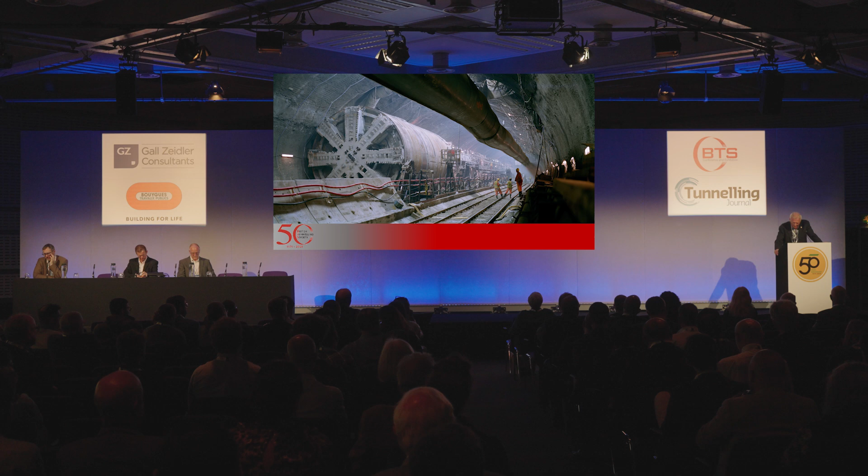So we had a very robust safety regime as well. And that's probably one of the legacy aspects of it. There was a step change in British industry safety-wise, as Donald Lamont would vouch for. And that, again, is a very good legacy.

I've got a few notes, excuse me, just to make sure I don't run out of things I was going to say before I do.

One of the incidents that we had that didn't really get talked about much was in the crossover. And it's strange, that chamber looked absolutely enormous until the tunnel boring machine came in. And then the tunnel boring machine looked really small, and it was over 9 meters diameter. And the chamber didn't look quite as big. So when they came into the chamber, it sort of spoiled the image of it all.

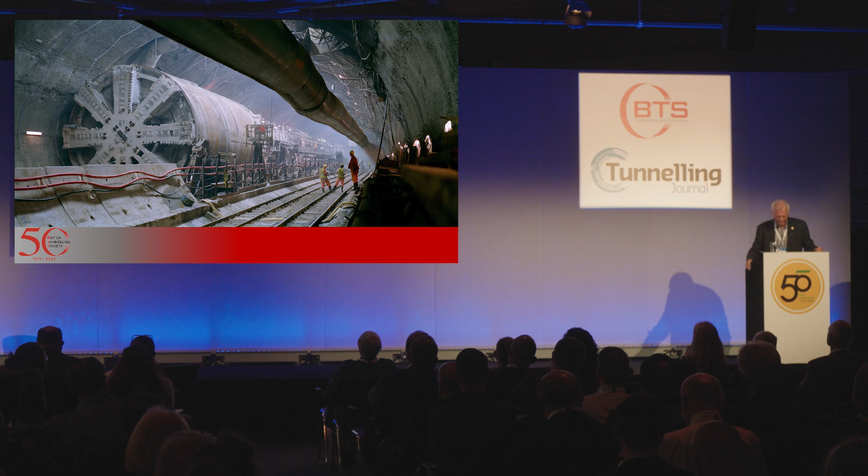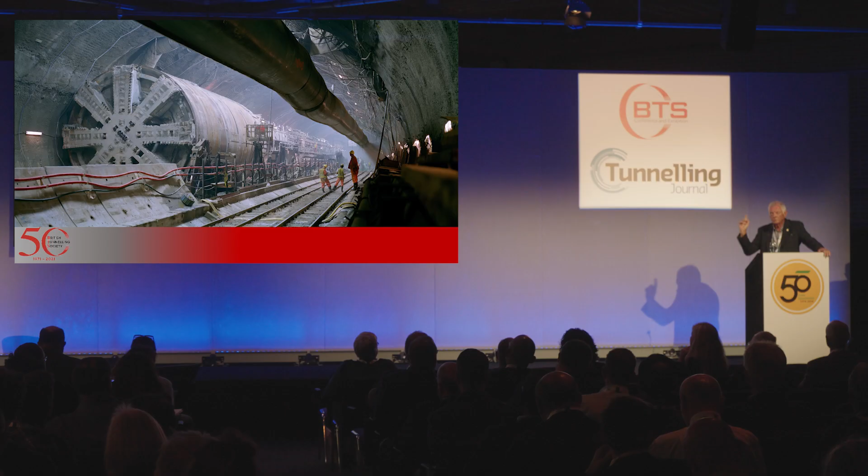I remember taking one of the technical experts from around the world who used to come there, and it was 7 kilometers out from land along the service tunnel to get to the crossover chamber. Whilst we built that chamber, the marine service tunnel boring machine advanced another 7 kilometers, with all the cross passages associated with it, every 375 meters, etc. And the chamber was built from just a small passage that we created out the side of the service tunnel.

I took this Japanese expert into the tunnel, and it's 160 meters long, this chamber. It was 22.5 meters wide, that's a cricket field wide, and 18.5 meters high. The excavation of it with the primary lining had just been completed when I took this guy up. And he walked in and he was just awestruck. Wow. And he rattled on in Japanese about how unbelievable the size of it was.

And when we were doing the crown of the tunnel, there was a sudden crack down both sides, in an area about the size of this room, and water started running out. It came about, not from the sea, because there was a volume of water just above the tunnel where the pressure had built up on the ground as we constructed the chamber. And it cracked down both sides. We were 7 kilometers out under the sea.

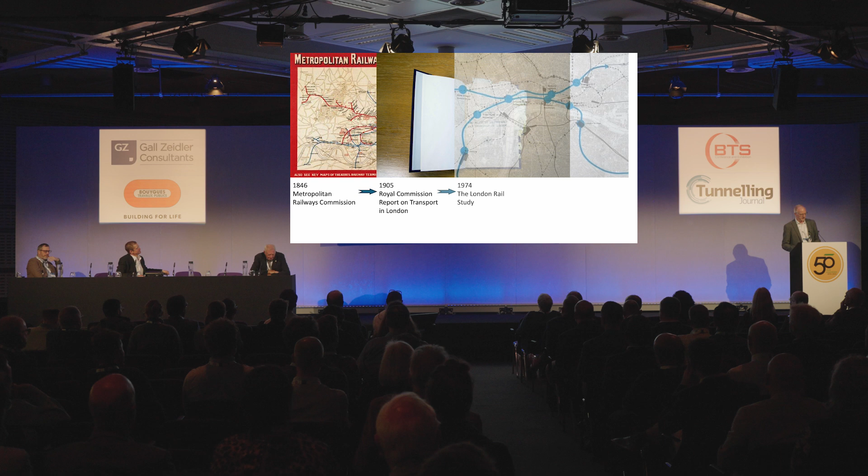Okay. No, I think the Channel Tunnel pretty much just about top trumps Crossrail in terms of the gestation period for the project. But thinking back, there have been schemes for a cross-London link going back to Brunel's time, principally when he wanted to link up Paddington with his Farringdon station as well. And then through the many decades, a cross-London link of one form or another appeared in various documents until it started gaining a bit more momentum after the Second World War.

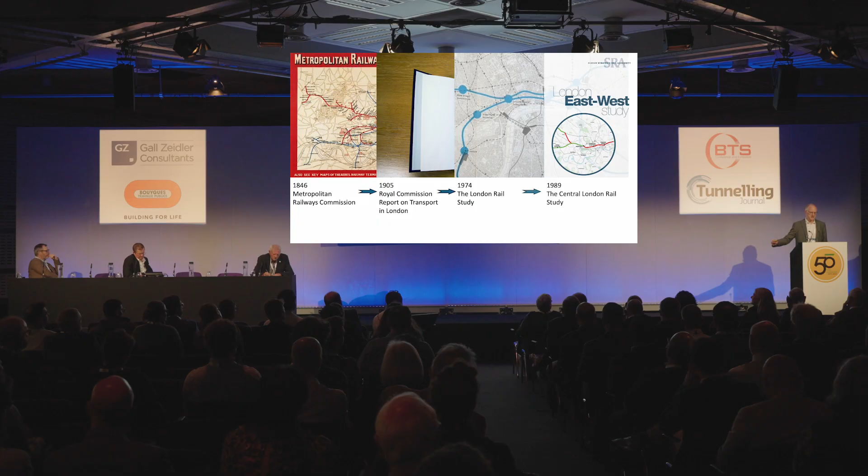But by 1989, we were producing documents that were talking about the Jubilee Line, which is now built, Crossrail, which is now built, and the Chelsea Hackney Line, which is not quite built yet and on hold as Crossrail 2. From that point onwards, I'm kind of referring to my CV, because I came off the Channel Tunnel in 1990 and I started work straight away on the Crossrail project preparing the parliamentary plans. So we're doing parliamentary plans in 1990.

By the mid-90s, we'd completed a full detailed design of the Crossrail route. I worked on the western section from Royal Oak Portal to Tottenham Court Road. That was fully designed, specified, contract documents ready, and then the government pulled the plug. Obviously, £2 billion was too much to pay for a railway in London at the time. The project then went on hold, and finally it started coming to life again in the mid-2000s.

So by about 2005, we'd gone back a few design stages, but we were producing designs for a revised scheme. This time I was working on the western section. And then by 2008, the whole project got approval. 2009, I started working on it full time. And then the tunnelling work started in around about 2010. The majority of the tunnelling was finished by 2015, but there were a few bits and pieces of other works going on after that time.

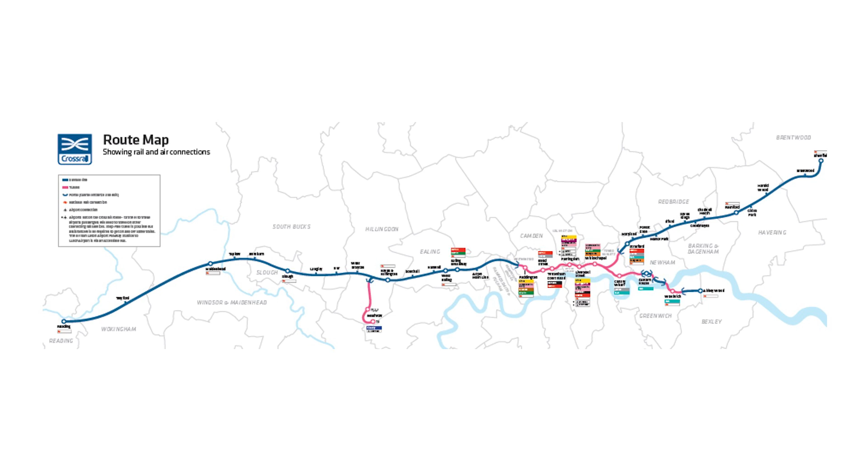Now, at the time, the project was the largest project in Europe, with a route running from Reading in the west, all the way past Heathrow, picking up a spur from Heathrow, through the central city districts, Docklands area, and out to Shenfield in the northeast and Abbey Wood in the southeast. The aim of the scheme, and it's achieved this, is increasing London's railway capacity by about 10%, and relieving congestion at some of the major stations, particularly Paddington and Liverpool Street. So it's relieving crowd congestion.

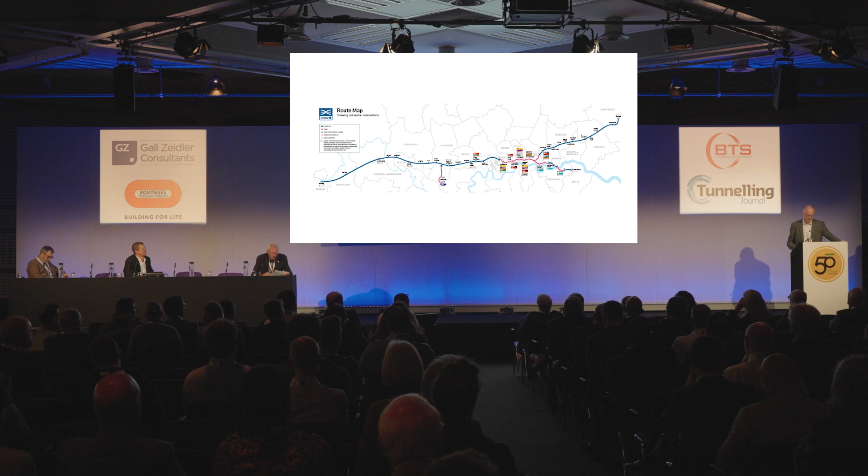Since the scheme's now open, it's brought about 1.5 million people within a 45-minute travelling time of the central business districts in the city. And it's believed that since the project opened, 200,000 new jobs have been created close to the scheme. That's including office workers, new hotels have opened, there's even a new museum on the route, and food outlets as well. In fact, in 2023, 51% of the new office lets in London were within a 10-minute walk of Crossrail.

Now, none of that information is the most important thing about this project, but no matter what anyone tells you, the most important thing about this project is that it was in tunnel through the central section. Now, the main route through the central section is there. You can see all of the different structures that were built, the main structures, stations, shafts, bifurcations, etc.

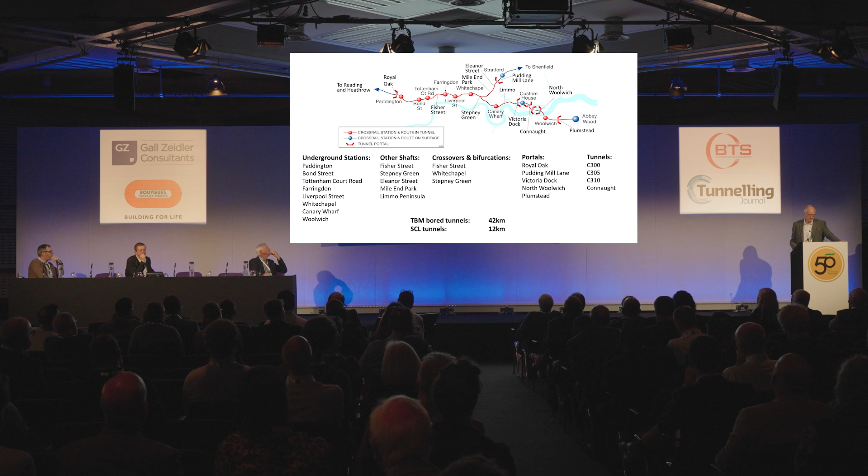And the only thing I'm going to point out on this slide is that for the main tunnel drives, Contract 300 was driving tunnels from Royal Oak Portal in the west to Farringdon. Contract 305 worked from Limmo Shaft in the east, driving tunnels to Farringdon and out to Victoria Dock, but also the section from Stepney Green up to Pudding Mill Lane Portal. And Contract 310 was the main tunnel under the Thames.

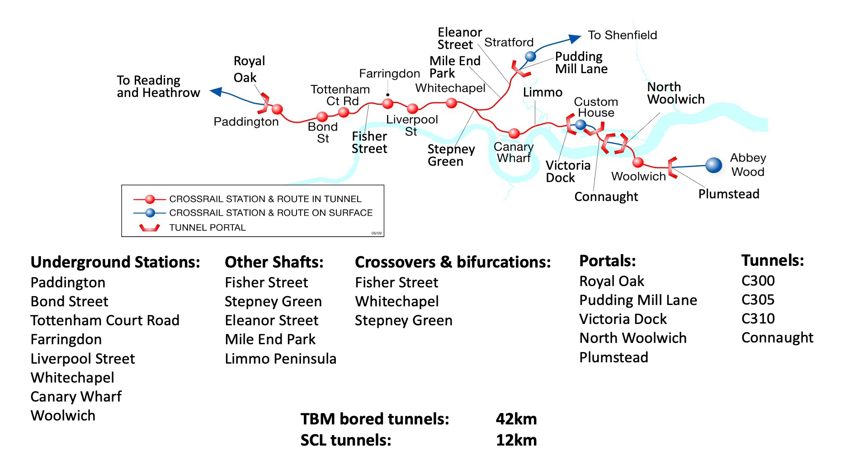In terms of the geology, the tunnels were principally in London clay in the western section, pretty much all the way from Royal Oak Portal to Fisher Street. And then from Fisher Street, moving east, we were dipping in and out of the Lambeth Group, Woolwich and Reading beds to most of us, even getting into the Thanet Sands in places as well. And as you move further out to the east, the Thames crossing went through various strata, but the majority of that contract 310 was in the water-bearing chalk.

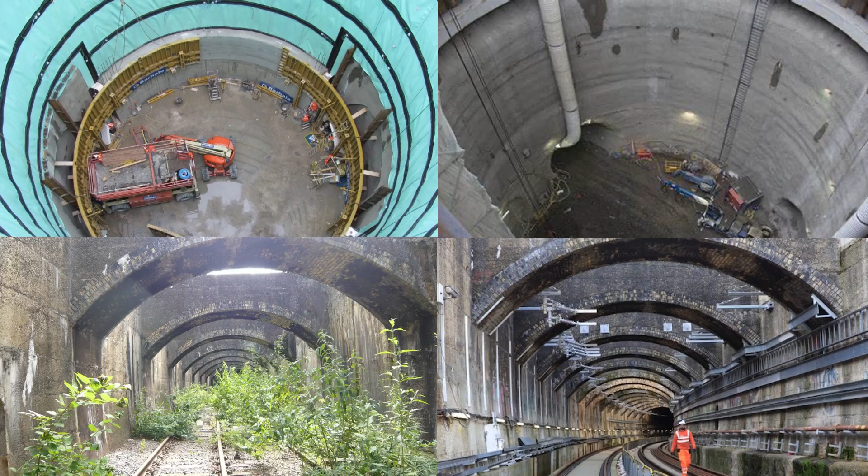Now, I'm not going to have time to go through every structure on the project. I've got a few pictures. The rest of the presentation is pictures, hopefully to remind a few people of happy days. By the time we were working on the project, certainly 2005 up to 2008, we were deleting shafts from the project, but there are still a number of major shafts on the scheme which are acting as plant rooms, ventilation adits, and access points as well, particularly where the station spacing might be a little bit large. The other tunnel worth a mention is the Connaught Tunnel, because that's slightly different from everything else we did on the scheme.

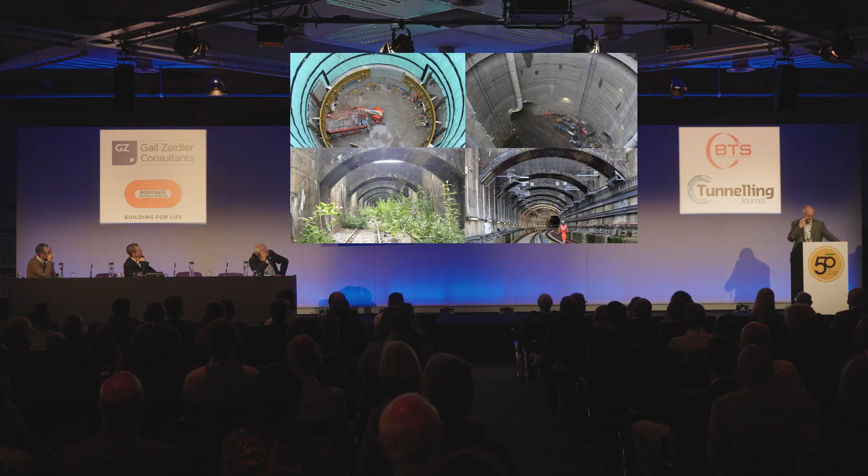Connaught Tunnel was pretty much a disused, dilapidated tunnel. It was too small. It was falling apart. It flooded on a regular basis. And on that scheme, it was brought up to modern railway standards through a combination of replacement and refurbishment works.

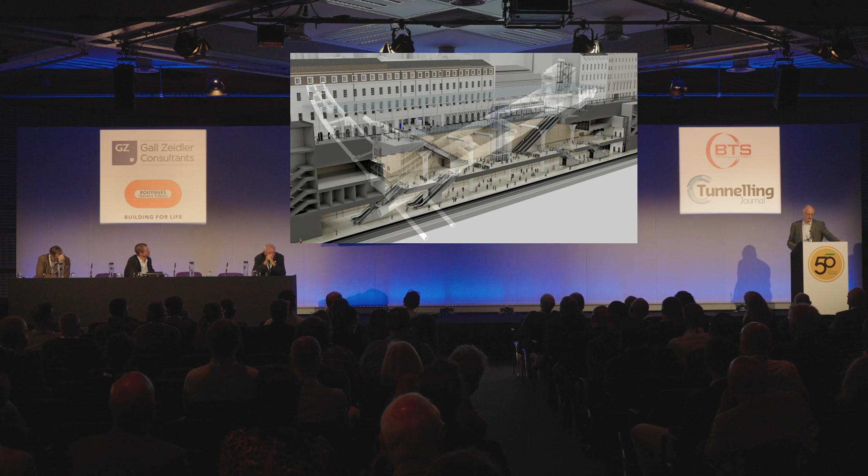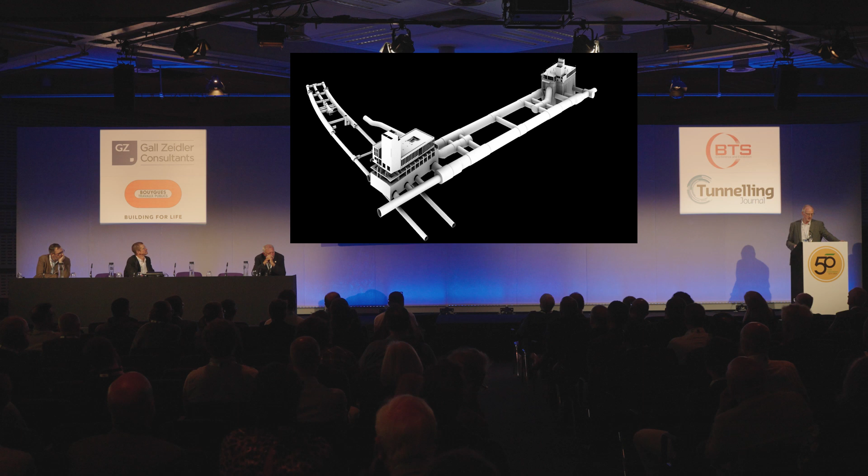If we look at the stations on the project, they pretty much came in two flavours. The first flavour is large box structures, like the one there. That's actually an image of Paddington. And the other flavour was bored SCL-supported ground, bored tunnels for the platform tunnels, concourses, escalators, etc., but with slightly smaller boxes at the ends, housing ticket halls, plant rooms, and again, ventilation equipment, etc.

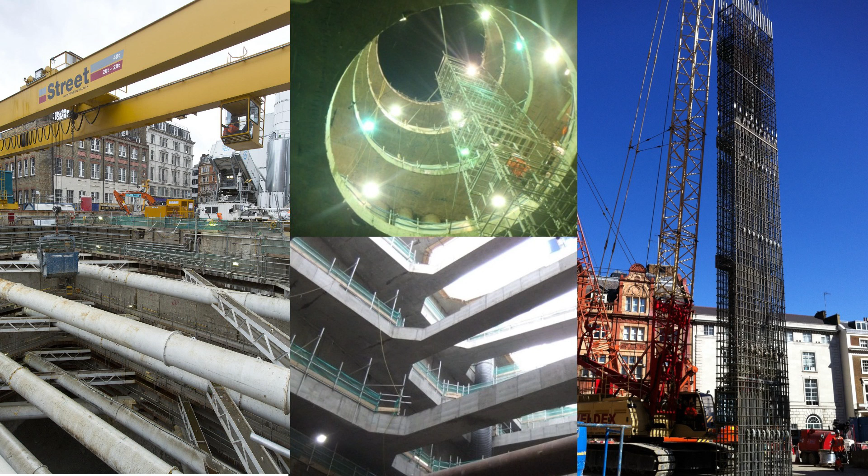So those big box structures were constructed through a combination of diaphragm walling and piling, again with a mixture of top-down and bottom-up construction techniques, quite often constructed in very confined spaces with sensitive neighbours. Sometimes the sites we were working on were actually no larger than the station footprint itself. So very, very difficult conditions.

Also, a lot of these stations and shafts at some point in the contract might have had a TBM passing through them, so they had to be designed for that. And it also became a bit of a programme issue in getting everything aligned between the different contractors to decide who's going first, who's going to be second, who's going to stand around for a little while the other contractor completes his work.

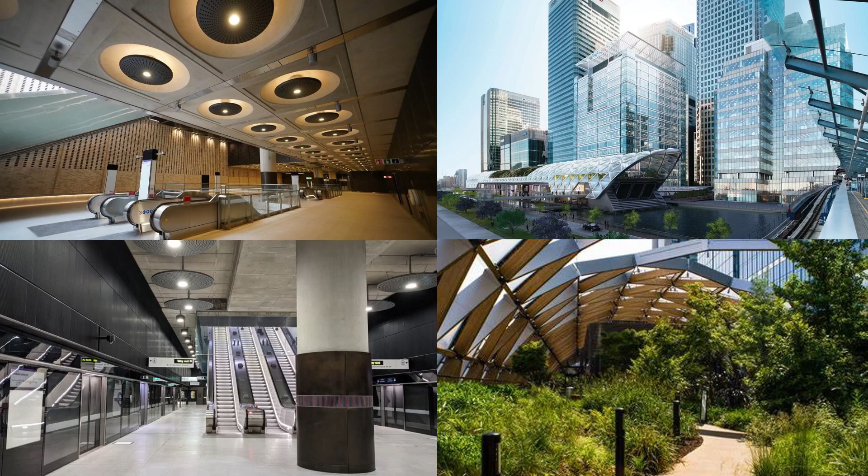The completed station boxes all have a slightly unique feel to them along the project, but they are generally structures that have tried to use natural light wherever possible. They're not the largest structures in the world, but by London standards, they're pretty impressive. The Canary Wharf station, for example, on the right-hand side with the garden in the top, the length of the Canary Wharf station is the same, or just slightly less than the height of the Shard. So it gives you an idea of the size of the excavations we were doing.

For the bored platform tunnels, the platform tunnels, the escalators, the concourse tunnels were all very similar size and shape, around the 10-metre mark for the finished diameter. They were constructed with a sprayed concrete primary lining, waterproof membrane, and in most places a sprayed concrete secondary lining. Farringdon was the exception, where Farringdon used sheet waterproof membrane and cast in situ secondary lining. All of the other platform tunnels generally had sprayed waterproof membrane. A couple of the stations that were in water-bearing ground in the invert had sheet membrane and a cast in situ invert.

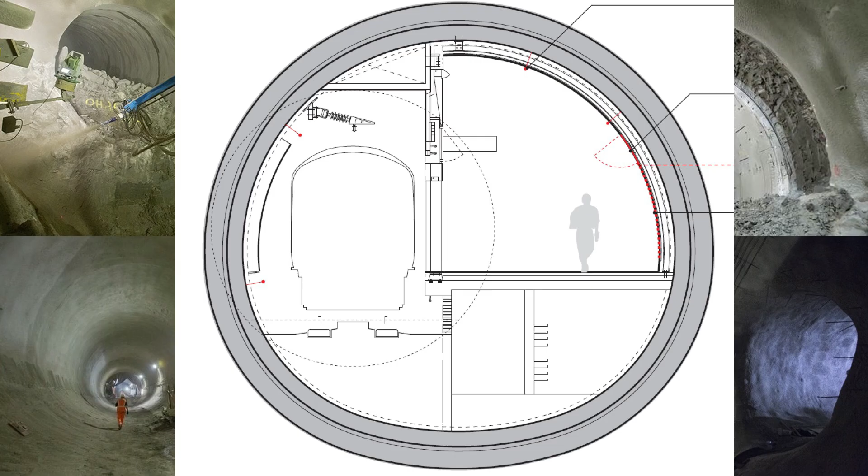The primary lining on Crossrail was taken to be part of the permanent works. So it's taking some of the ground load that's developed before the secondary lining is put in place. The secondary lining then shares the remainder of the ground load and the water pressure.

This actually caused a few issues on Crossrail and some very difficult situations with the interfaces, because the client required the primary lining to be the design responsibility of his main designer. It was an engineering design project. But the contractor was essentially responsible for that lining during the construction process, supporting the ground, preventing ground movement, and for the safety of the works. So there was an issue about who has responsibility for what and when that changed. And that's bad enough in a simple round tunnel as shown there. When you start dividing up into side drifts and having cross passages junctioning with the tunnels as well, that responsibility matrix got very, very difficult.

And for those of you in the audience that were involved in that, I'll take this opportunity to say thank you, and I hope your psychiatry bills weren't as much as mine. For those of you that weren't involved in that, don't ever, ever do it again.

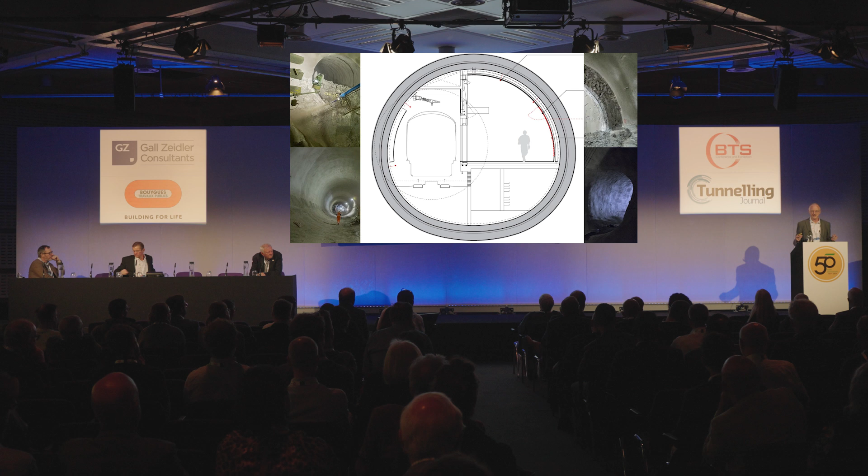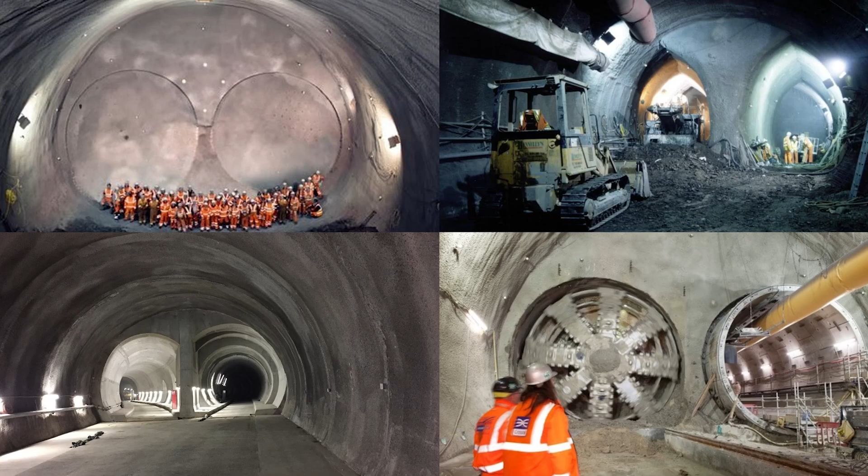So the main station tunnels, generally we tried to work to recommendations in terms of excavation sizes that were recommended following the Heathrow collapse. So we were trying to work to about 30 square metre face sizes and about 4.5 metres height in terms of unsupported face. So we ended up with top heading, bench, invert type construction and pilot tunnels through various stations as well.

The pilot tunnels were either sprayed concrete lining or segmental lining if the TBM went through that station first. Where the segmental lining was used in the pilot tunnel, the length of the rings was 1 metre to align with the excavation sequencing for the sprayed concrete linings.

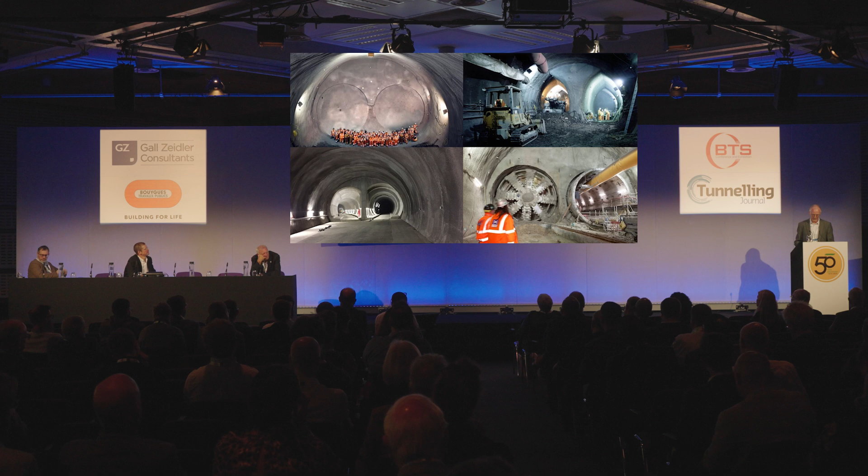The finished bored stations have a slightly more uniform identity across the whole project. They were meant to feel spacious. There's wide platforms, the cross passages are wide, and the concourses are wide as well. So the identity of the project was very much space. The length of the platforms is about twice the length of a standard London Underground platform. So hopefully some of you have been down there to appreciate it.

A lot of work was put into using these curved corners, certainly at the cross passages, but many other areas as well. Again, it was partly an architectural requirement, but it was there to help increase the feeling of the space within the project as well.

There are other SCL structures on the project. These were either bifurcations, which is Stepney Green, where the line splits to the northeast and southeast of London, or they were crossovers, as there were at Fisher Street and Whitechapel. Again, there were multi-face excavations, top-heading bench invert, single side drifts, double side drifts, to achieve the finished product. And again, the lining systems were very much like the platform tunnels, sprayed concrete primary lining. Again, division of responsibility issues there.

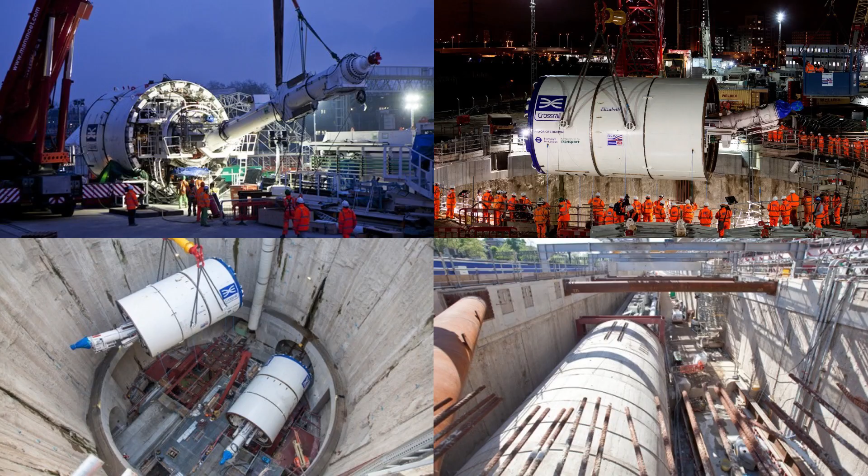Excluding delays, tunnel progress rates varied across the project, depending on all sorts of variables. But generally, average rates were between 10 and 18 rings per day, so that's 15 to 25 metres per day as an average. I believe the maximum advance rate achieved was about 95 metres in one day. So pretty impressive stuff when they got going.

For the tunnels and the stations, we were working under some of the most expensive real estate in the country, so we had to be careful with ground movements. On the station tunnels, with those massive concourses and platform tunnels, we used a large array of compensation grouting to keep the world up where it belongs. On the TBM bored tunnels, the contractors generally worked to a contract requirement of 1% ground loss. There were a few special control zones where we worked to between 0.5 and 0.75, depending on what was required. So we were generally controlling settlement at the face rather than relying too much on other protection works at the surface.

I believe the typical range, we went over it a little bit on a couple of occasions, but typically the contractors were comfortably achieving between 0.25 and 0.5. Most of the time they were probably well under that, and certainly under the 0.25 on many occasions.

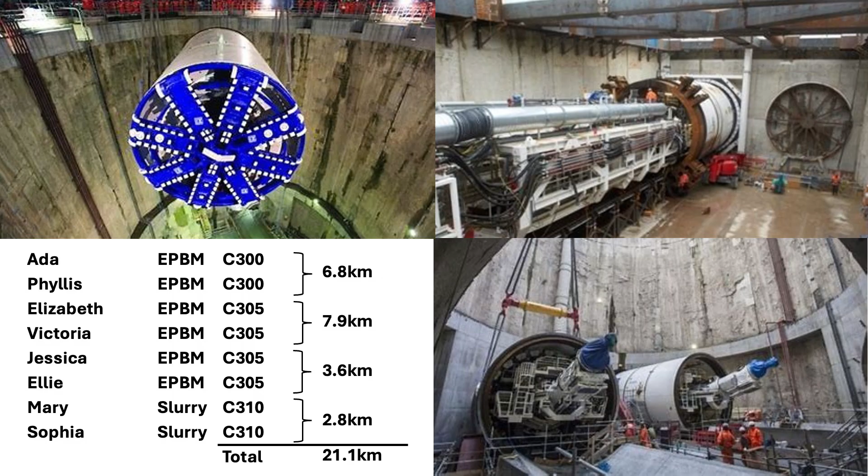The TBMs launched from shafts, relaunched through stations, etc. These were all fairly standard. Just a couple to note that were slightly different. At Royal Oak Portal, the TBM was erected about 600 to 800 metres away from the portal face, and this was to avoid any heavy lifts taking place very close to the mainline railway going into Paddington. The completed machine and the backup was then transported down to the portal face.

And on contract 310, the Thames tunnels, they used the tension rod launching system, launch ring system. So basically tying the launch ring to the head wall in front of you and using tension to push the machine into the ground, which eliminates the need for temporary rings to shove the TBM off a shove frame.

In terms of reception, again, lots of different receptions in adits and through head walls. The interesting ones to note on the project were at Farringdon, where driving from the west, the machines turned a sharp corner, much like we're looking at on the Channel Tunnel. We turned a sharp corner, stripped out what we could and buried the machines in the ground either side of Farringdon Station. The machines coming from the other direction were dismantled underground in purpose-built chambers at the end of the platform tunnel.

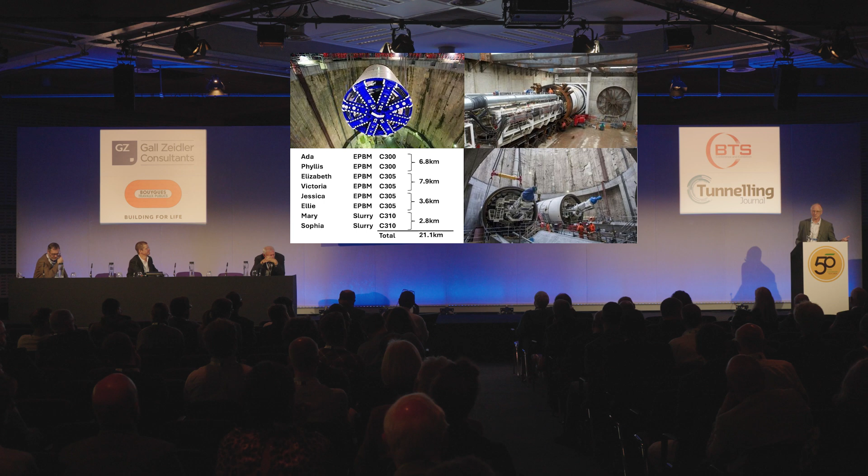The tunnel spoil was generally removed through conveyors, through the tunnels up to the surface. Obviously, with the slurry machines, it was pumped out. And from the surface, it was either transported by barge or by rail. About just over 98% of the material was reused on various schemes. Most of it went to Wallasea Island to create a bird sanctuary, but there were a few other local initiatives as well, filling up old landfill sites, etc.

Segmental linings, I'm going to whip through the segmentals. We've all seen lots of segmental tunnels. They were supplied, manufactured on three main sites: Old Oak Common was one site, Chatham in Kent was another site, and the Shay Murtagh facility in Ireland supplied segments as well.

They were all steel fibre reinforced, and there were a couple of local sections, particularly under the floating track slab, where we needed to have a little bit of reinforcement in the cages. 6.2 metre diameter running tunnels, 3 dowels between the rings, 2 bolts through the longitudinal joints, which were generally removed where they had run a risk of coming loose and falling out and affecting operational railways.

The tunnels had a left and a right ring on 2 of the contracts. This was because we couldn't have the keys in the invert, as the loads from the floating track slab pads were not compatible with a key being in place. So we had left and right rings, rolling the rings, but keeping the key above the axis. Now, I didn't actually check this fact, it's just from memory and I may be wrong, but I believe contract 310 didn't have any floating track slab and essentially used a universal ring system. Just some more images of the ring build there.

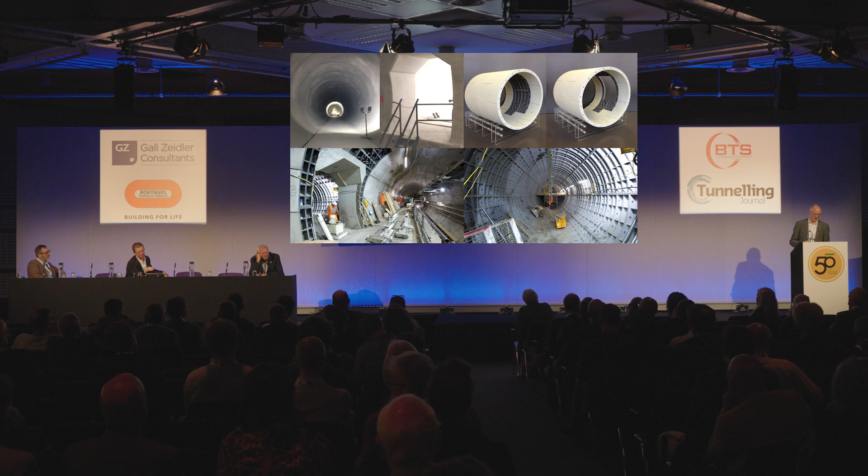There were many other structures and tunnels on the project - cross passages, diverted cable tunnels, ventilation adits, etc. There was a combination of using SGI and sprayed concrete linings. Where we were breaking out of the main running tunnels, we had what I think most people are familiar with now, which is the hybrid ring system - an SGI frame with temporary segments that can be removed, top right on the screen, basically forming the permanent structure, or the majority of the permanent structure, to support the opening.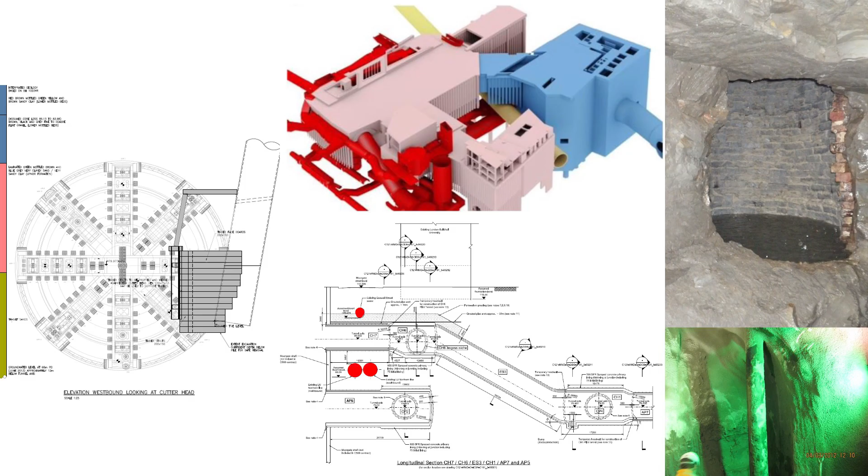Contract 310, again, did things slightly differently. They had more extensive temporary works and used a reinforced concrete support system. Now, obviously, everything didn't go perfectly on the project, but we had some good days and bad days.

Some of you will recognise those pictures of some of the things that occurred on the project. We hit a well at Tottenham Court Road, on the right-hand side there, a brick well. On the left-hand side there, we hit a raking pile in the docks, in the Docklands area - the TBM hit that. But there were some worrying times that actually went very, very well. At Tottenham Court Road, top centre picture there, we weaved the TBM through the existing pile structure. We passed less than a foot away from the Northern Line platform tunnel on that particular section of the route.

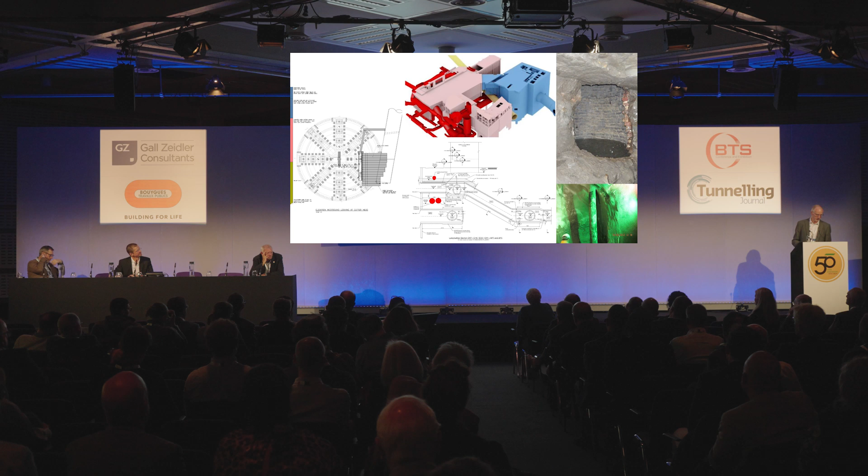The bottom centre picture there was one that always worried me in the early days. The red in the middle, the two red pictures there, are the Northern Line, and we were constructing a massive shaft, ticket hall box, and enormous SCL tunnels above and below the Northern Line there. Again, the line remained operational, but everything went swimmingly.

On the legacy side, when I first joined the project, the word innovation was almost banned, but that soon changed, and Crossrail introduced the Innovate 18 program, a way of sharing ideas and knowledge across the project. All of the main contractors contributed seed funding to that, and I imagine a lot of them paid for a lot of the work on their own projects as well. In the first year of initiating the scheme, we had 800 ideas come in, and 300 of those were funded.

The Innovate 18 program morphed into the I3P scheme, and I think there were some representatives here today. I usually get this the wrong way round, but I3P is the Infrastructure Industry Innovation Partnership. On the other side of the legacy, we collated and disseminated large amounts of information, which is still available today through the Crossrail Learning Legacy website.

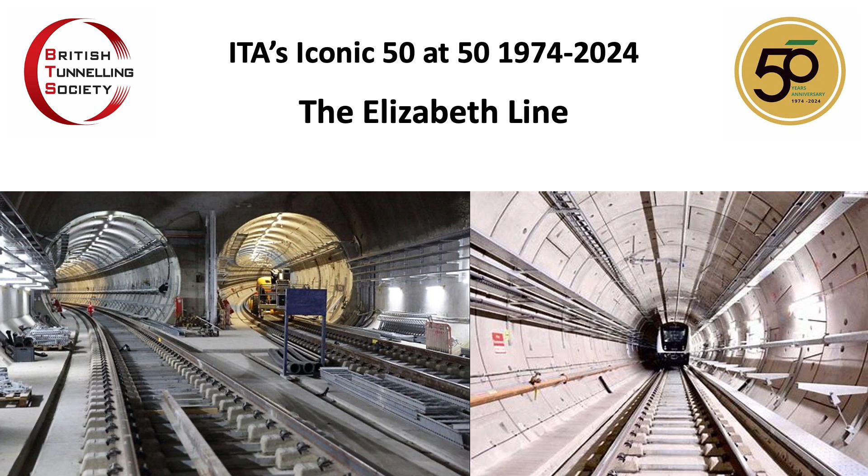Evening all. I'm going to talk to you about Tideway, colloquially known as the London Super Sewer. I'm conscious that probably many of you have been involved in the project itself, so I'll give you a brief history of the project, where we are now, and also touch on some of the softer legacy commitments we've made as part of the project.

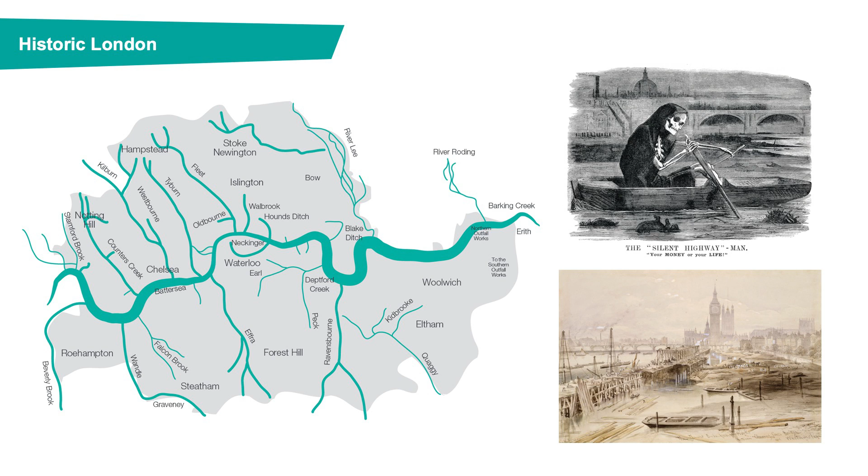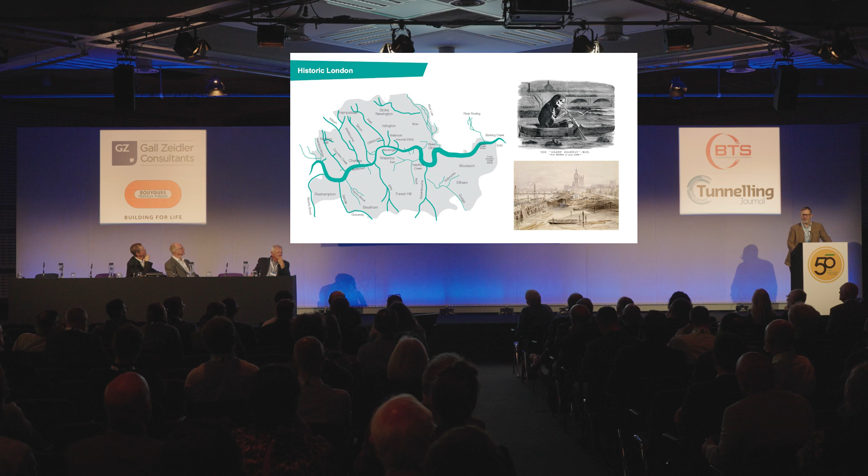So starting with the history. We're looking at the rivers there, the lost rivers of London, probably the early 19th, 18th century. As the population of London grew, those rivers became open sewers. In the early 19th century, they became culverted in, so they almost became officially sewers themselves, but they all emptied out into the Thames. As the population continued to grow, as the flows continued to flow into the Thames, it culminated in the Great Stink of 1858, which many of you will probably know a little bit about.

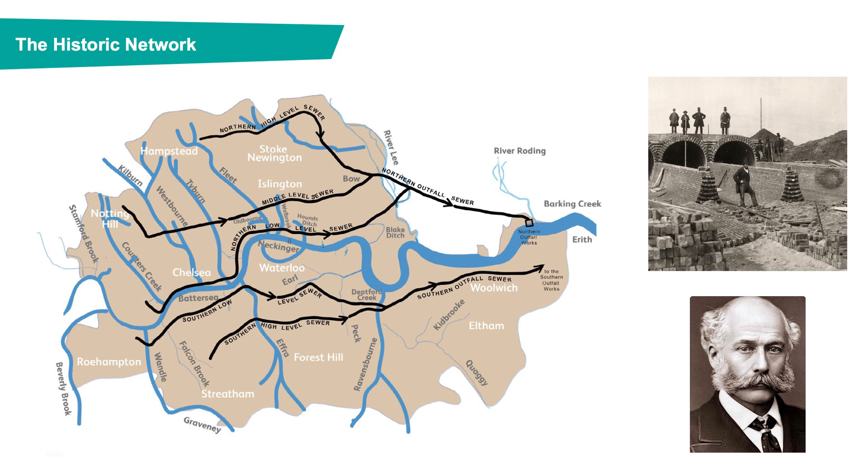This resulted in the government of the time decamping to Oxford for 3 years and setting a young man by the name of Sir Joseph Bazalgette on the quest to solve the problem. His solution is actually very simple: a number of interceptor sewers, effectively cutting off the rivers as they diverted down into the river itself. So he intercepted those flows and took them to a point in East London, now Beckton, which on a rising tide, where it outfalled into the river at Beckton, wouldn't reach the Houses of Parliament. So a very, very clever man indeed.

So the population in 1860, when he started work, was 2 million. As any good engineer, he decided on some additional capacity, so he designed it for 4 million. That population was reached in 1920. We've passed 9 million now, and we're heading towards 16 million. So those overflows, which he built into his system, effectively mean that when the interceptors are overwhelmed, they overflow into the river.

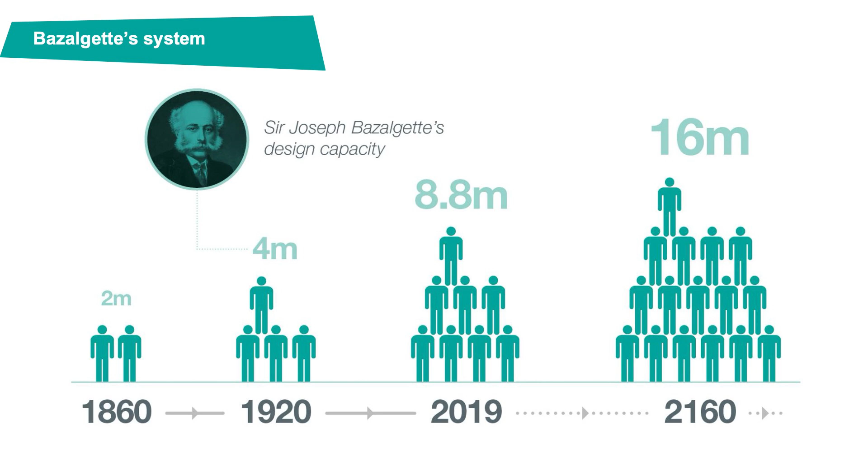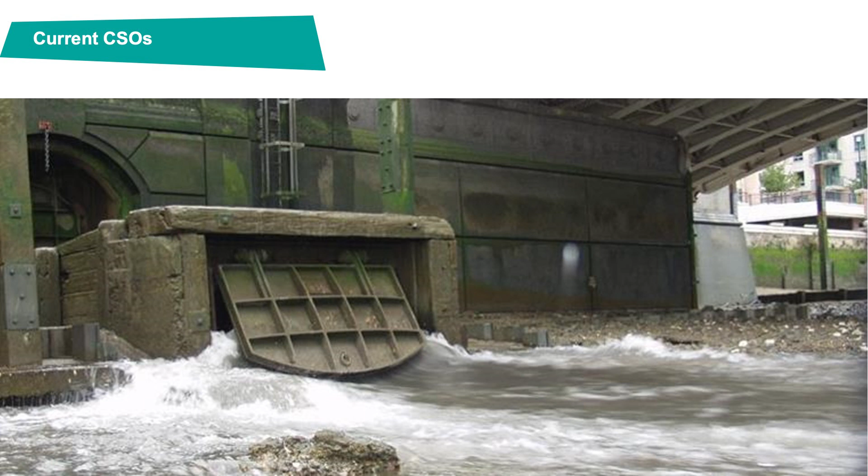So we have a problem. That is the problem. In a typical year, we have 50 to 60 discharges into the River Thames, all along the tidal Thames, with a typical outfall of about 39 million tonnes of sewage. Not a nice thing. Now, the actual solution to this problem comes in 3 parts.

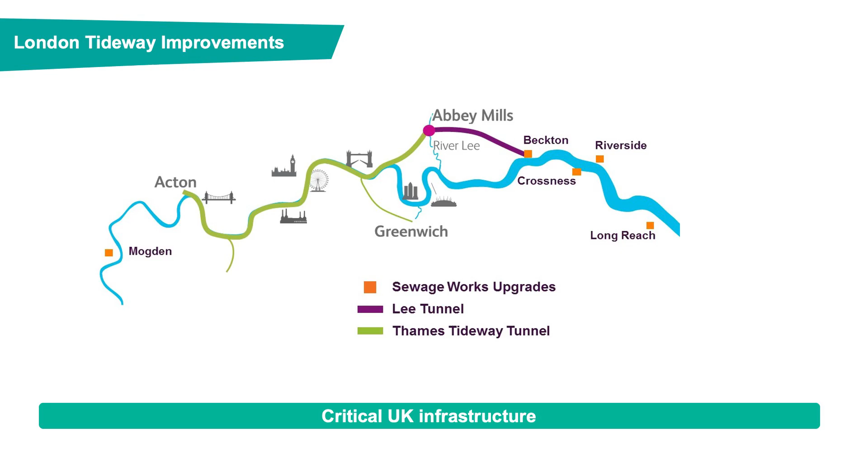There's the sewage treatment works upgrades, which were all completed earlier in the 2010s. The Lee Tunnel, which was completed back in 2015, 2016, has been operating since then. Why was the Lee Tunnel done early? That was because Abbey Mills is the single largest contributor to outfalls into the Thames itself—that's 40% of all the flows into the Thames as CSO discharges come from Abbey Mills. And the last element of the puzzle is Tideway, the Tideway Tunnel.

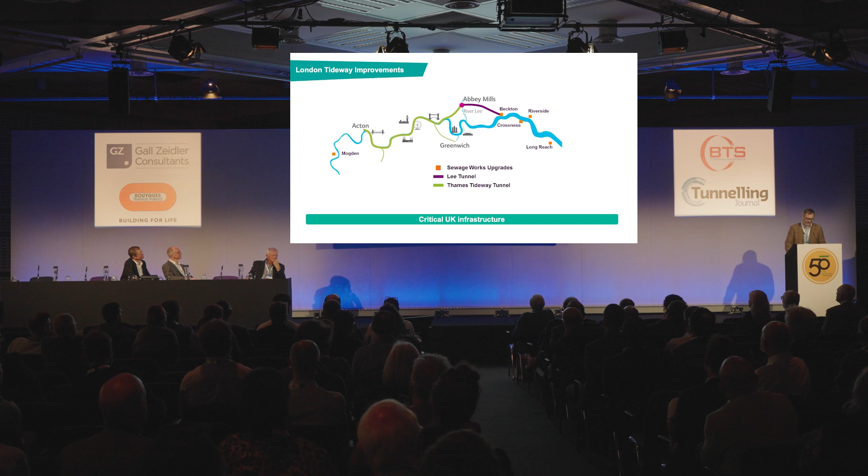So how does Tideway work? Well, effectively, it's a 25-kilometre tunnel. The majority is 7.2 metres in diameter internally. It falls from Acton in the west all the way to Stratford in the east. Collectively, with the Lee Tunnel, it has 1.6 million cubic metres of storage.

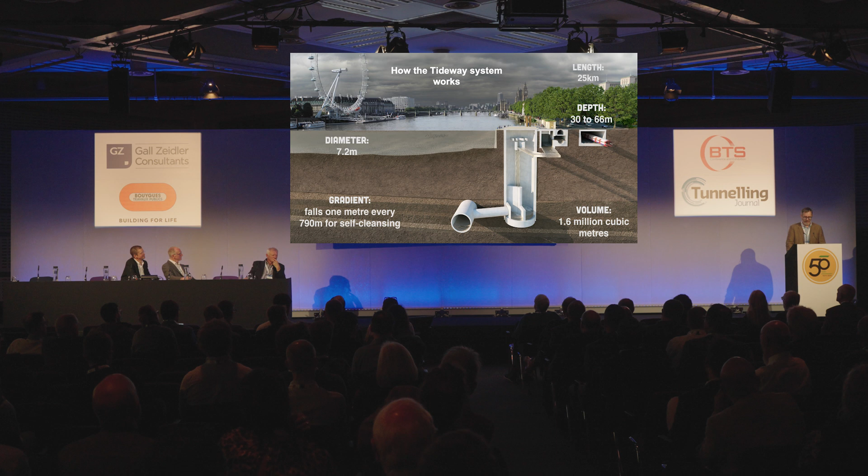This is a slice through the Victoria site, which many of you probably passed today on your way here. The gradient is 1 metre in just shy of 800, and it starts at sort of 30 metres deep in Acton and slowly falls down to sort of 66, 70 metres in Stratford. The Lee Tunnel itself actually finishes down at sort of the 80 metre mark, where there's the Tideway pumping station at Beckton, which then raises all the flows back up for treatment through the sewage treatment works at Beckton.

That's the tunnel itself, so it's 23 sites. There are 18 direct interceptions of outfalls into the Thames. It influences a number of others, so effectively there are 57 outfalls in total across the tidal Thames. The Tideway Tunnel and the Lee Tunnel effectively influence 37 of those outfalls, which results in a 95% reduction in discharges to the Thames.

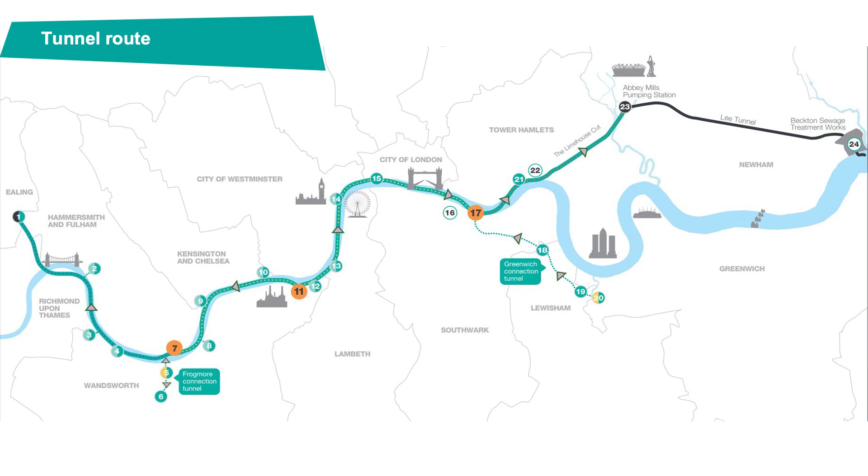Very simply, in section, this is the tunnel. There were three main works contracts, West, Central and East, all tunnelling contracts, loosely aligned with the geology. So West was predominantly in the London clay, Central was in the shingles and the sands, and

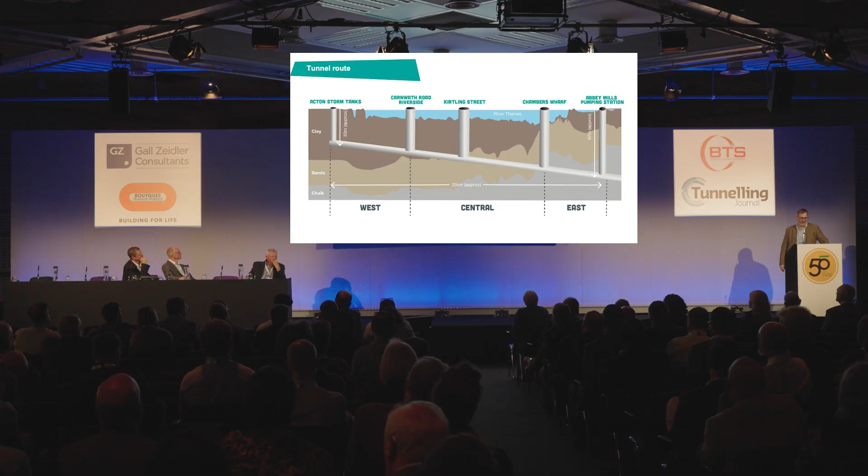the Eastern contract was predominantly in the chalk. The Central contract was the only double drive shaft on the project, but there were also two rather significant connection sewers: one through Greenwich, a 5 metre diameter connection from Greenwich pumping station, and also one in Wandsworth, which was 2 kilometres of 2 metre diameter connection sewer.

So delivering those tunnels, consortia, JVs, three main works contractor JVs, made up of BAM Nuttall, Morgan Sindall, Balfour Beatty, Ferrovial, Laing O'Rourke, Costain, Vinci, and Bachy Soletanche. So the main works were undertaken through an Option C target price NEC contract.

And then connecting them all up was the systems integrator. So this was the control system, a fraction of the cost of the main works contracts, but very, very important indeed. And that's the stage we're going through at the moment, the systems integration piece with Amey. So they were under an Option E.

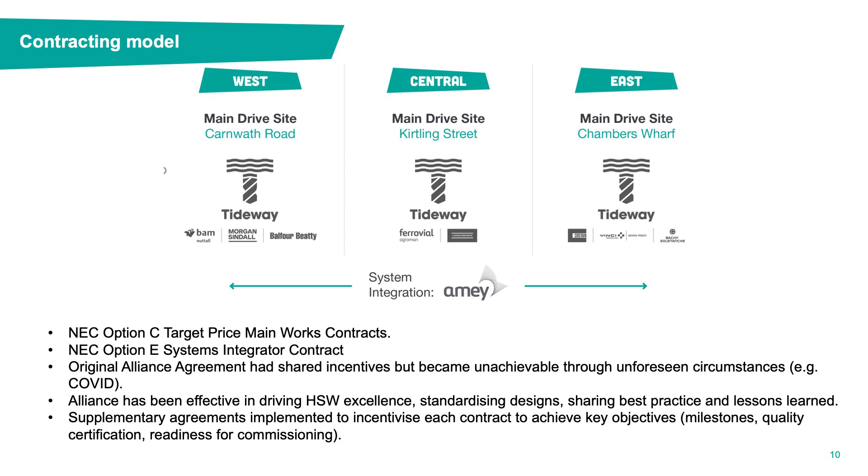They needed that flexibility because they needed to work with the main works contractors, so it seemed much simpler to do that under an Option E. There was a veneer over the top of an alliance agreement, which worked very well from a health and safety perspective and standardising designs, sharing best practices and lessons learnt. However, the incentives within that alliance soon became unachievable because of some of the issues encountered along the way, for example COVID.

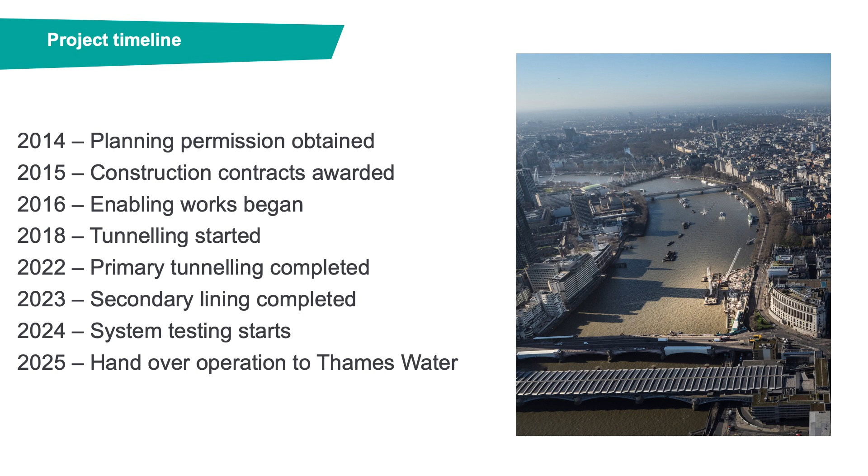Very brief timeline for the project: planning permission, the DCO, was obtained in 2014. There was a year of enabling works before the main works contractors started in earnest in 2015. Tunnelling started in 2018, and primary tunnelling and secondary lining finished, as you can see, 1 and 2 years ago now. So we are now in the midst of connecting up all those sites through the tunnel and activating those sites.

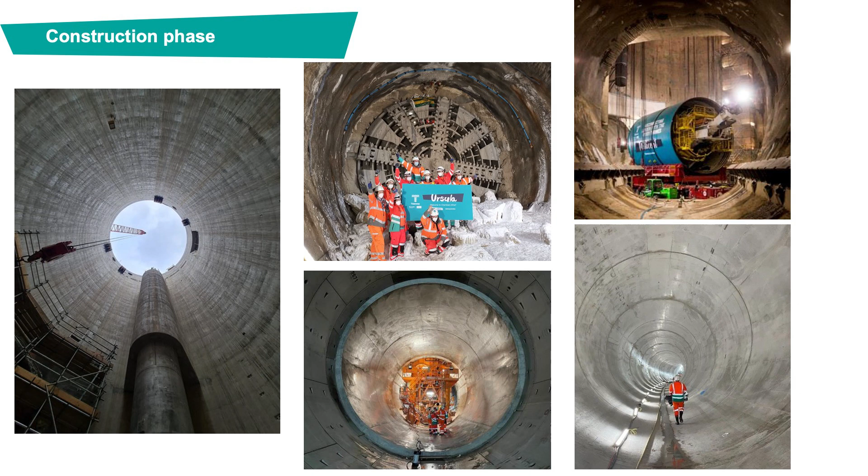So some of the pictures there, as I said, some of the tunnelling activity which is now complete. This is actually Abbey Mills pumping station, and you can see Bazalgette's old sewage pumping station in the background there, the Cathedral of Sewage, as it's colloquially known. So this was back in March this year.

This is effectively a large manhole cover being lifted into place on top of the shaft at Abbey Mills, the connection between the Lee Tunnel and the Tideway Tunnel. This was a 1,200-ton lift, a huge programme saving, because this was constructed just by the side of the shaft itself and lifted into place. This effectively sealed the tunnel itself.

And shortly afterwards, in May of this year, the isolation between the Lee Tunnel and the Tideway Tunnel was removed to form a single tunnel system reaching from Beckton all the way back to Acton.

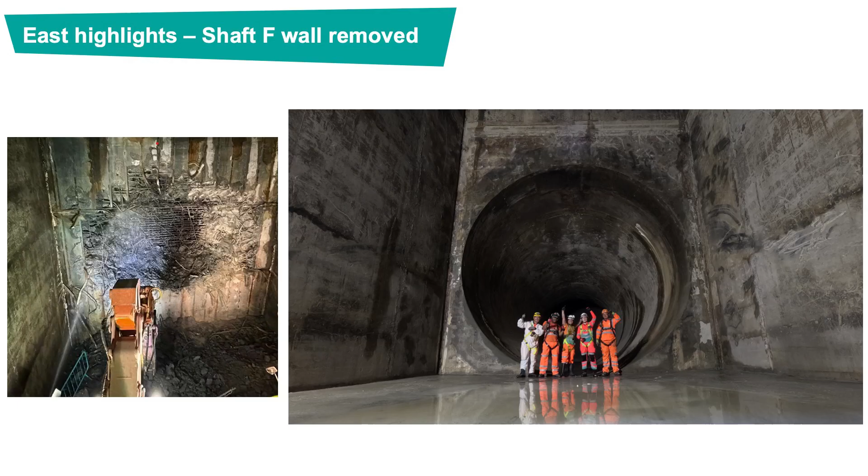So where are we now? We are actually, the West and the Central contracts are nearing completion. It's turned into a bit of an architectural and landscaping project for those guys and girls. We're doing a lot of worksite testing.

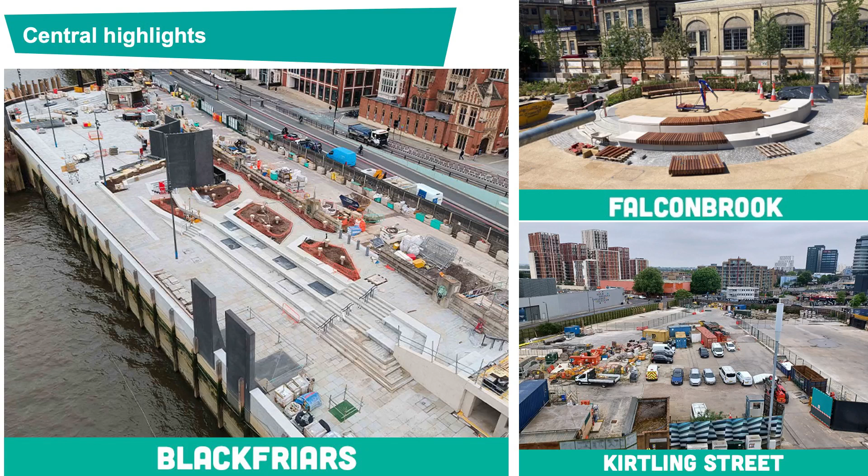Similarly, this is the Blackfriars site just down the road. This is the largest piece of new urban realm, which is going to be opened probably later next year. But as you can see, it's still coming along very well. There's still some very integrated and difficult works to be undertaken under Blackfriars Bridge, which you can't see in that picture.

Similarly, further west, that's Falconbrook Pumping Station in Wandsworth. Again, they're looking at effectively opening those sites very soon. And Kirtling Street, which was our double drive site in the middle of Battersea, right next to Battersea Power Station, was a huge logistics centre for the whole project, certainly from the central perspective, because it is driving east and west from that site.

That now is basically a large concrete slab, and the property is slowly being returned to its previous owners. Three land packages have already been handed back to Battersea Power Station, who will be looking to develop it.

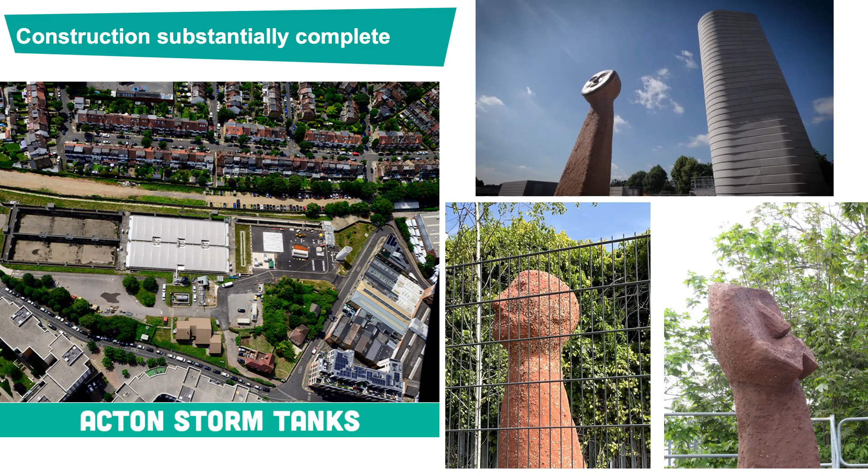Acton, so this is where the tunnel starts. It's actually a Thames Water site. It's a storm tank site. Construction is substantially complete there now. That's some of the artwork that's been built or installed on the site itself, and that was opened by the Bazalgette family, descendants of Sir Joseph, last month.

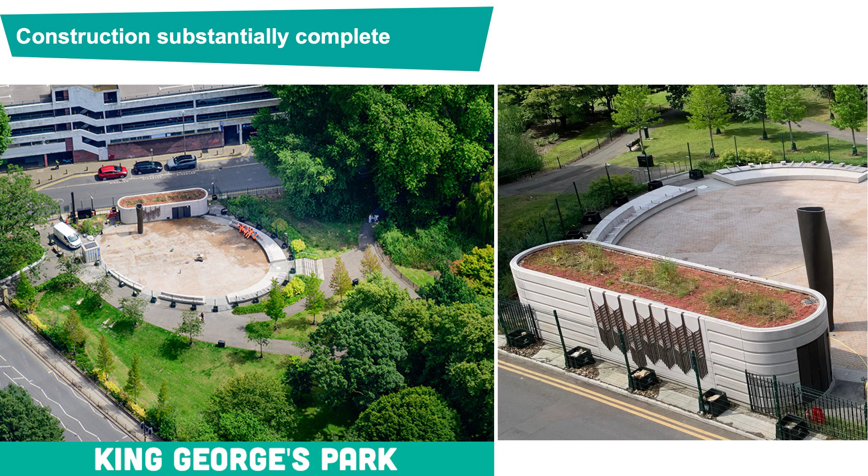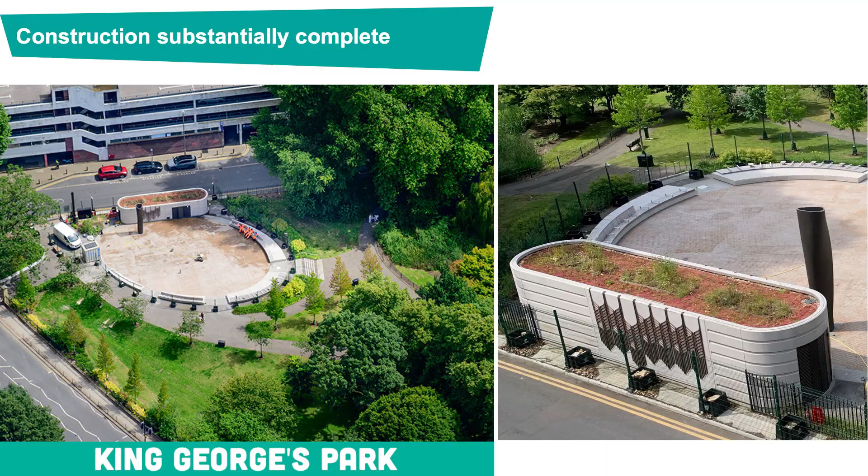Moving on to King George's Park, this is in Wandsworth. This site was handed back to the public about 3 weeks ago. There was a bit of an unveiling there with the council. Again, you wouldn't actually recognise it as a sewage interception site, but that's what's happening underneath. The egg shape there is effectively a rough outline of the shaft itself.

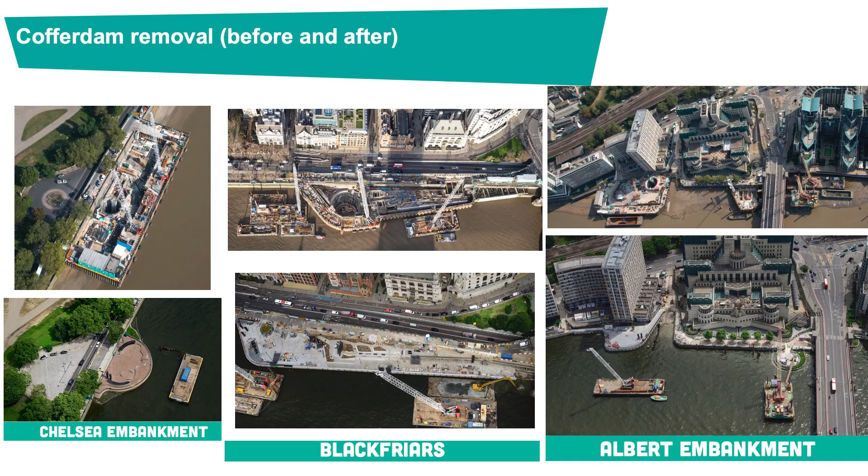And then moving on to some of the works that are going on in the central contract. Nearly all the river sites are in the central contract, or the central part of the river. So a lot of cofferdam, a lot of marine works have been undertaken there. So we're at the process now of actually removing those cofferdams.

You've got before and after pictures there of where they were probably a couple of years ago and where they are now. So a lot of the marine works have been undertaken and completed across Chelsea, as we've seen before, Blackfriars, as we've seen before, with Albert Embankment, which is another one of the sites directly in front of the MI6 building in Vauxhall.

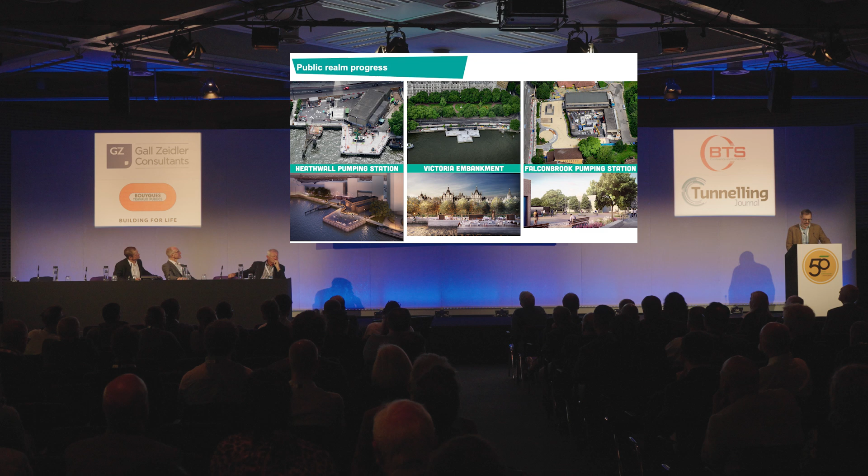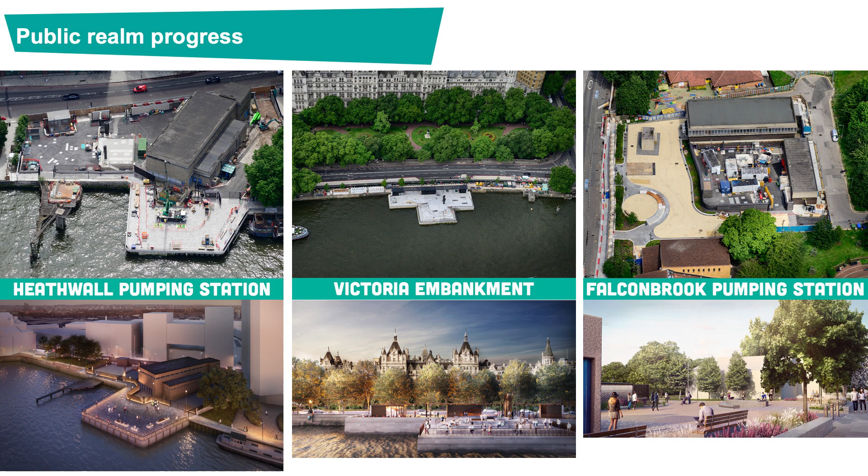Some of the sites that aren't quite there yet. So Heathwall Pumping Station. Again, that's right in the middle of the Vauxhall development area. Victoria, that's nearing completion. That's probably the nearest site to this one, and probably the best place to go and watch the fireworks, I would suggest, next year, because it's directly opposite the London Eye, and it is actually a very, very good piece of public realm.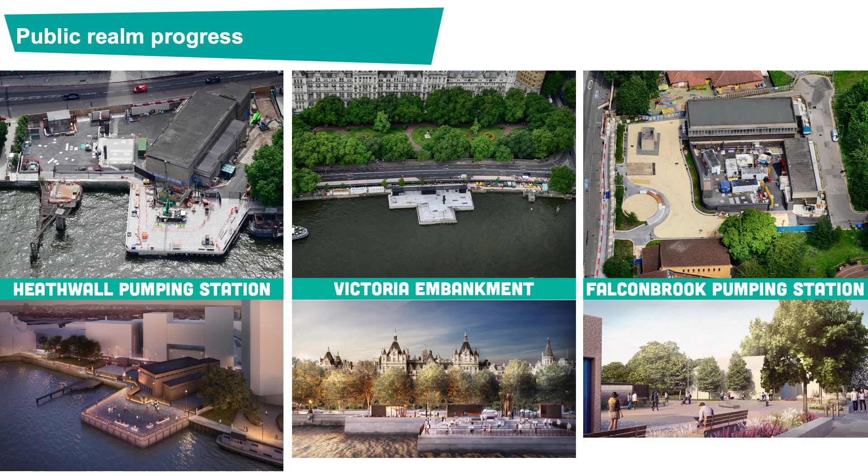And finally, in the central, that's Falconbrook there. Again, the pumping station, as you can see, the Thames Water pumping station in the middle, but the new public realm that's surrounding it.

Moving on to East, well, construction's still ongoing in East. I'll start with Earl pumping station. So that opening is actually just to show where the last flume, the last piece of temporary works which were intercepting or protecting the workforce from the sewer flows, were removed earlier this year.

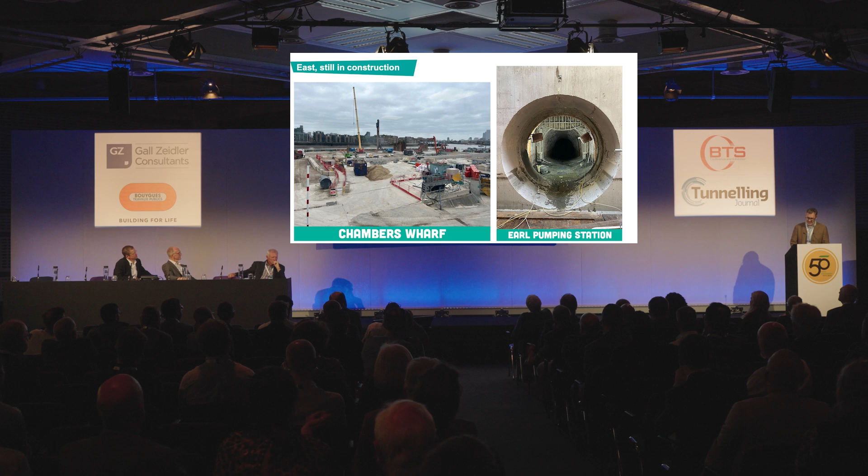And then on the left, Chambers Wharf, which was the drive site for the East contract. That had a large cofferdam constructed, increased the size of the site by 30 to 40%, just as a logistics yard to be able to do the tunnelling from there. Now they're in the process of removing that cofferdam, and I think circa 35,000 tonnes of material needs to be removed before that cofferdam is fully removed.

Finally, in East, King Edward Memorial Park. So this is in Wapping. So again, you can see the marine works going on. So that's cofferdams coming out again. A lot of the sites now in East are in the mechanical electrical ICA testing phase. They were always slightly tail end Charlie from the other two contracts. So they are very much the critical path for completion of the whole project, but they're well on the way.

Now, we didn't get there without a few key challenges. So just a few there. I'll pull out a couple really. I mean, there's the thing called COVID that had an impact on us.

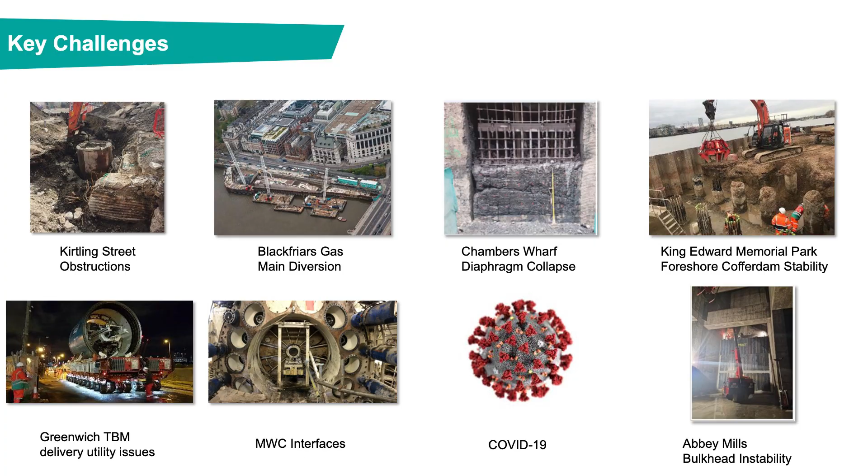King Edward Memorial Park, there's the foreshore cofferdam stability. That's probably one of the few cases where, when we got the development consent order, we had to actually amend it for a design change there. Originally, the KEMP site was an online shaft, but because of that ground instability, it had to be designed as an offline shaft to maintain programme.

But some of the other challenges we had, certainly the Greenwich TBM delivery was a bit of a challenge, only because it was hoped to deliver it in one piece, but in the end, because of the utilities and the weight, it had to be cut into 3 pieces and then reassembled on site. And then the last one, the Abbey Mills bulkhead stability, we had to construct some additional temporary works to secure that isolation between the 2 tunnels.

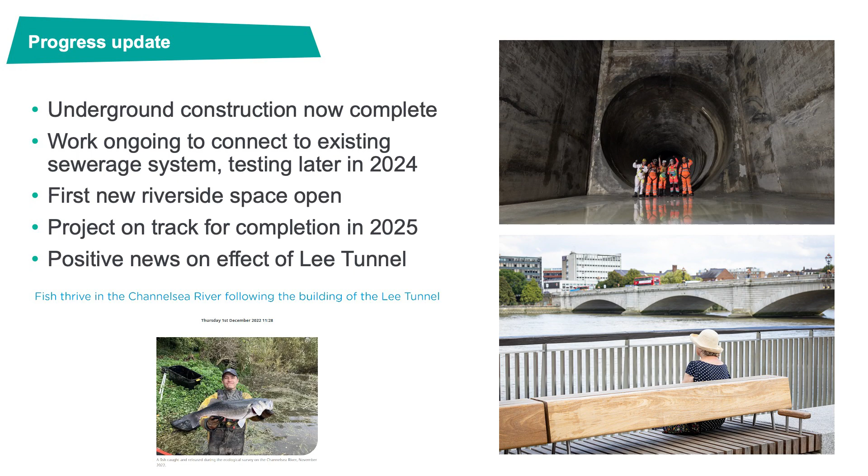So where are we? Underground construction is now complete. We're ongoing with connections to the existing sewerage system. We're actually in the middle of testing as we speak. And the first new riverside spaces are open, as I've said already. We're still on track for completion in 2025, probably summertime in 2025.

And the bottom left-hand corner there, that was a sea bass that was pulled out of the Channelsea Creek. That was the Abbey Mills outfall, which used to discharge into the Channelsea Creek. Before we did the connection between the Lee Tunnel and the Tideway Tunnel, the EA went out and did a fish survey of the Channelsea Creek, and they started pulling fish that size out of it. So that is the benefit of us not discharging sewage outfalls into the Thames. The fish life is coming back. And this is a small tidal creek off the River Lee, so goodness knows what else is available in the Thames.

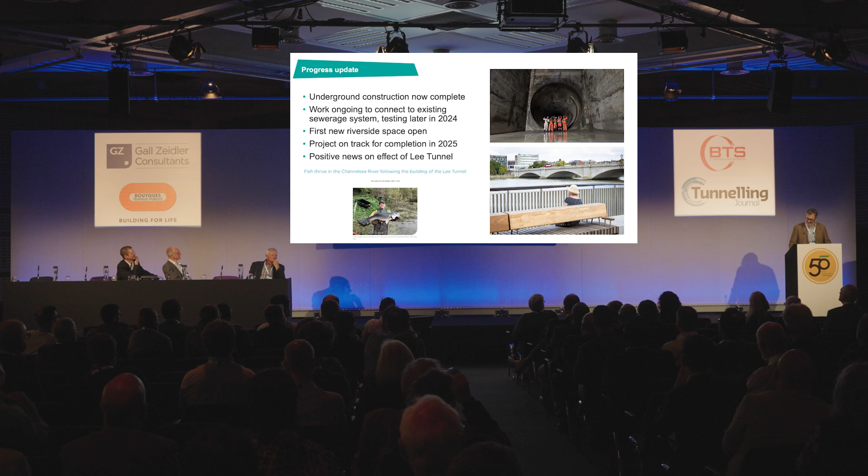So, hot off the press, we've activated 3 sites. That's Barn Elms, King George's Park and Dormay Street, all in the west. They're all the smaller sites. And as of today, we've also activated the Acton site as well. So flows are now being accepted into the tunnel from those sites.

It's a gradual process because of the complicated control system that runs the tunnel and the operation of the tunnel. Each of the sites is activated, and then there's a pause just to make sure that the tunnel's working properly, but also that there are no other issues regarding those sites and those activations. But it's great. It's a great place to be. After nearly 10 years of construction, we are at the point of intercepting flows and cleaning up the River Thames.

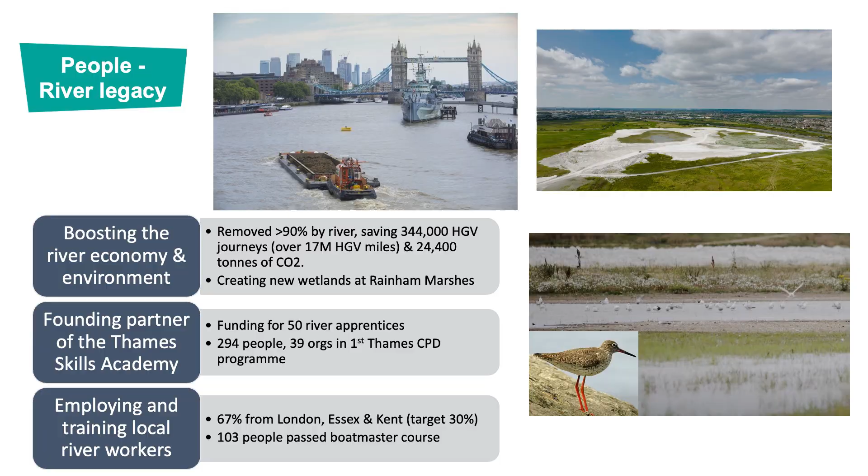We also invested in safer HGVs. We worked with TfL to have the world's first direct vision standards for HGVs, and a number of them were deployed across the project. River legacy. So this is people and economy. So boosting the river economy, really. So we had commitments within the DCO to use the river, but we did more by river. We focused on doing more by river.

So more than 90% of spoil and materials was delivered by river, saving 344,000 HGV journeys, circa 17 million miles, and a saving of 24,400 tonnes of CO2. One barge is equivalent to 50 plus HGV lorries. So although very sceptical to start with, the whole of the main works really adopted this programme of using the river. We trebled the freight on the River Thames with one project.

To go along with that, the project invested and was a founding partner in the Thames Skills Academy. And that was for river apprentices, to bring on the new generation of the marine operative. So 294 people have been through that program so far. And also looking into employing local river workers. As you can see there, 67% from London, Essex and Kent, against a target of 30%, which was in the DCO. We've also got a boatmaster course, so that's a competency course that all boatmasters need to go through to prove competency for the River Thames, and without that competency, they don't get to work on the project.

I asked Peter for another question because I didn't have a chance to talk about the railway, the locomotives. We knew that we couldn't get there ventilation-wise with diesels, so we decided we would go with electric overhead catenary, pantographs, etc., which had never been done before. We didn't get too far before the water coming in was a lot more than what we expected, and that affected our TBMs as well because we didn't have a tailskin. We were building tight against the ground. So we came up with the idea of fingers above the TBMs to protect from broken rock coming in with the water. We had a lot of water for about 500 metres, 600 metres.

But the water caused problems with the locomotives, which were Hunslet locomotives made in Leeds. As I say, it was the first time they'd used catenary or anything like that. Eventually, we realised that whilst we needed them to get 21 kilometres, we weren't going to get there unless we used some diesels. So we employed Schoma diesels alongside them. The Schoma pushed out the heavy loads of spoil, and the electric overhead catenary took in all the segments and things.

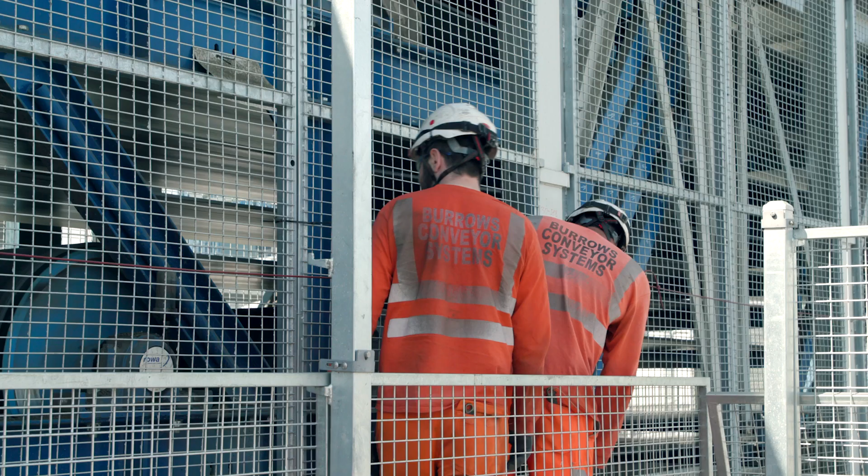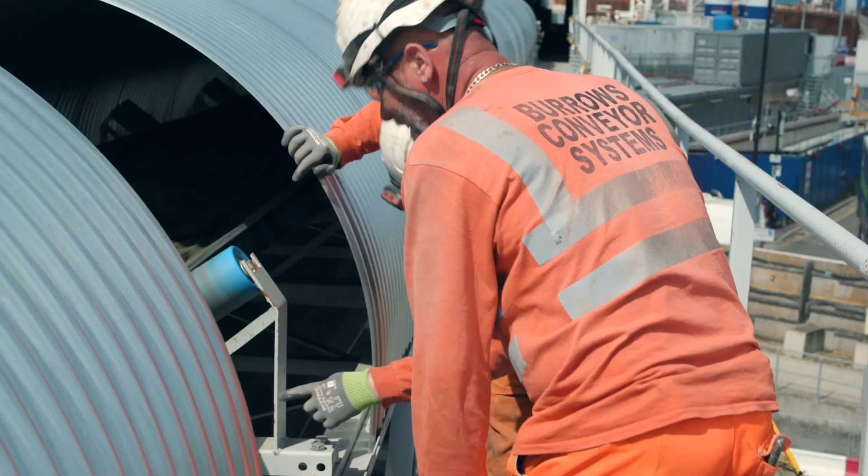Okay, so there's a little video here from Neil Hancox, who is the chair of Tunnel Skills, and hopefully this plays okay. Tunnel Skills was founded in 2008 to answer the industry's cry for a fully competent workforce. It was established with a group of consultants, contractors, labour providers and training organisations who are already affiliated with the British Tunnelling Society. Tunnel Skills is a national specialist training group. We look after the UK tunnelling industry's skills, competency, knowledge and training.

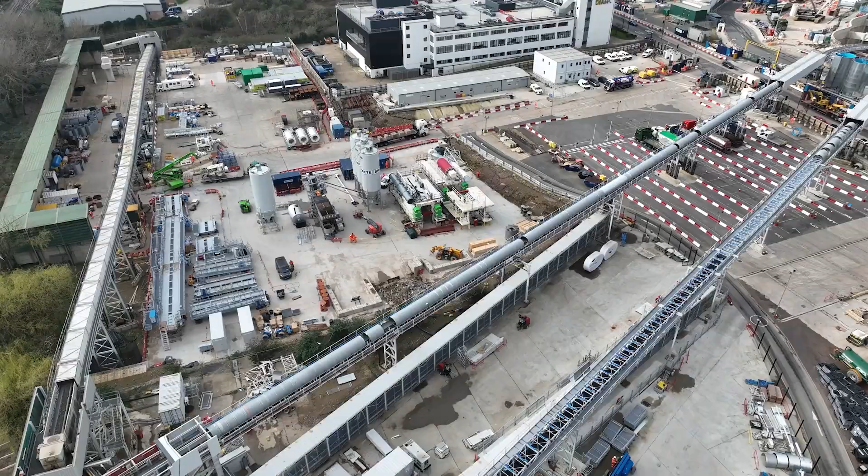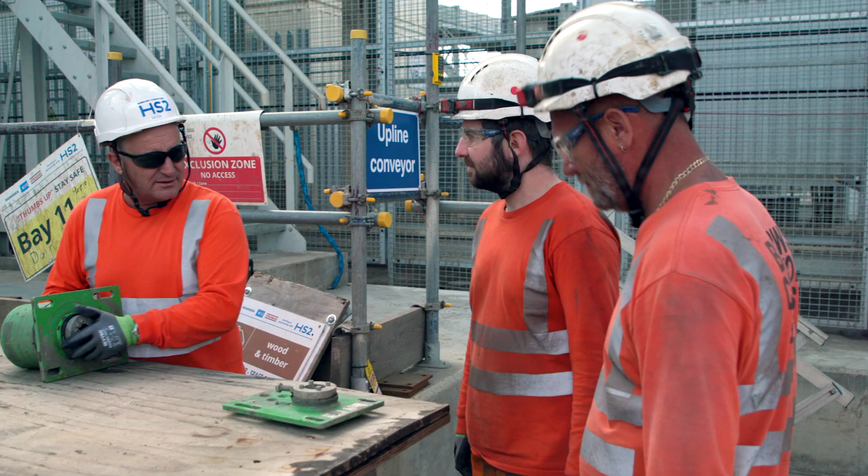During recent times, alongside the upkeep of existing industry qualifications, we've focused on closing the gap in establishing competency frameworks for all tunnelling occupations. Due to the increased use of conveyor systems, the latest qualification to be launched is the Overground Spoil Removal Conveyor Operations NVQ and training course. The benefit of it is, the conveyors are quite dangerous and there's been no training on conveyors before. Basically, you could bring somebody in and they could be a conveyor operator with minimal training. But now the industry is stepping up, more training, more safety awareness and everything else. So it's a lot better for everybody, the companies and the guys. I'd specifically like to thank the Tunnel Skills Working Group and the CITB Standards team for collaborating to launch this qualification.

Okay, I don't know if Neil's out there, but thank you, Neil. I've attended a couple of the Tunnel Skills meetings and they're very well attended by different people across the industry. So it's really good.

What else have we got? Okay, the book. Those of you who heard Sarah earlier, it's been a long journey. It's been six years in the making. I believe a book is going to turn up tomorrow morning, air freighted from the printers in Italy.

Though most of you, if you've pre-ordered, we're looking at the back end of October for those, possibly early November. There's a few little I's and T's to cross and dot to get them into this country. But the air freighted advanced copy, all being well, will be here tomorrow. We have ordered additional books, so if you haven't ordered a book yet, you still can do that via the website. So we haven't run out of books yet, but it's not a limitless supply. So if you haven't ordered one yet, I suggest you get in quick.

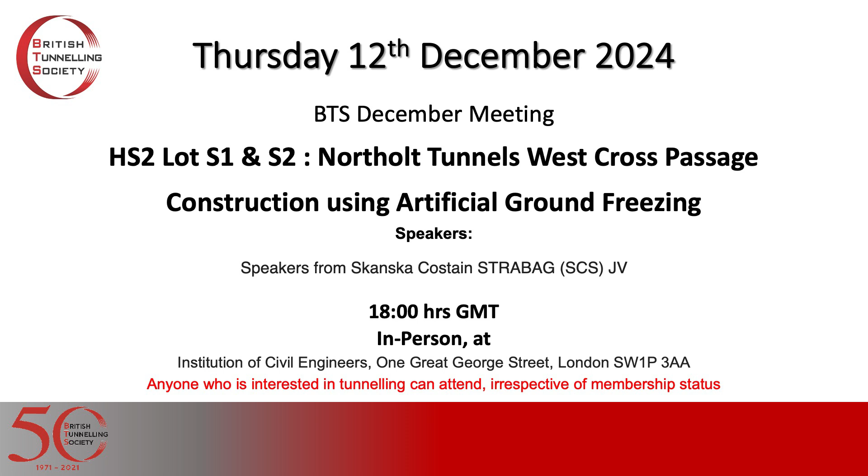This has been spoken about a lot today, Net Zero Tunnelling Group, and how the industry needs to reduce our carbon footprint down to that zero level that we're after. So the BTS have formed a group under Richard Southerden, and they've got a range of people from the industry, from different areas, clients, consultants, contractors, suppliers, to come up with some unified guidance to show us the way, our industry, to reduce our carbon footprint.

All right, another one here, Thursday the 7th of November. So this is the Young BTS AGM, and then their meeting, Overcoming Challenges in Horizontal Directional Drilling, a geotechnical engineer's perspective. And that's from GCG. And then their annual conference, Young Members BTS Conference. And from what I've been hearing today, very innovative, coming up with different ways of doing things in terms of presenting the conference. And it's great to see that. So that is on Friday, the 29th of November, from 8:30 till 5 o'clock. And that's at the Arup offices in Charlotte Street.